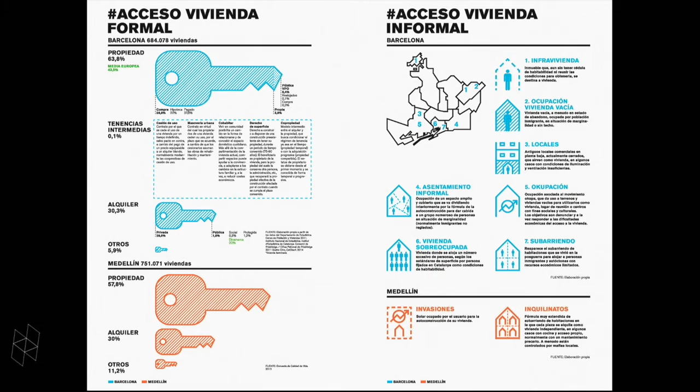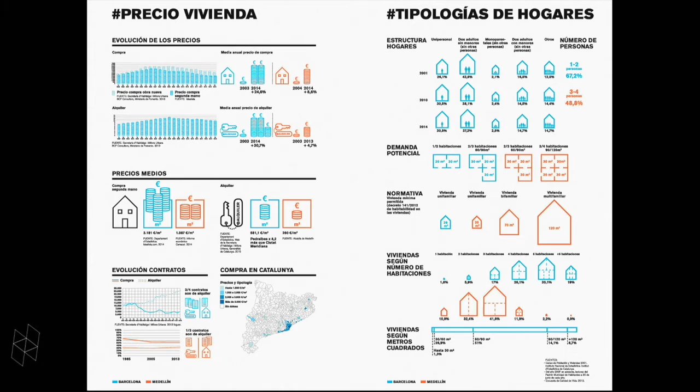So the exhibition took several hashtags: the tenures, the informal access, the price, the typologies—which of course we know the laws in Spain are terrible because we still work and design like the family house, when we know there are many other demands on housing—the evictions, the empty houses, the cooperatives, the refurbishing.

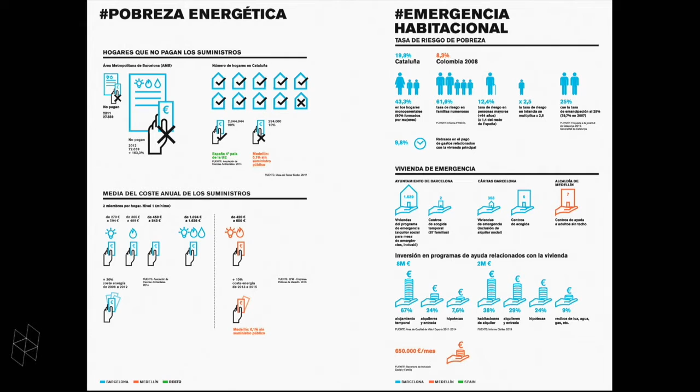The fuel poverty, where 10% of people don't heat their houses, and we know this is a very big problem with costs on health and health services. The emergency, the homeless, gentrification—I'm not going to stop there, but as you understand, we are losing one neighborhood every 5 years—and health.

So we didn't want to be so pessimistic, and the exhibition was an optimistic claim, because we think that many people, just because the government didn't do anything to solve the problem, have invented new ways to solve that problem.

With different strategies, putting people at the center of municipal policies might be a way to change what happened. The inside strategy—we were talking yesterday with Carles Muro about the Nolli plan—we are talking about the black, not the white. We're talking about what's happening in that black box, thinking that maybe we can make a new cartography of the city by starting there, talking with the people, knowing exactly how they live, and then thinking about which kind of street you need.

And of course this idea of tactical and pilot housing, which is a tension against quality and quantity. We need to build a lot of housing, and we know the best housing takes care of the people. So this is slower, and the quantity is less.

So we went through many projects. There are more than 70 projects that we are now doing in several parts of the world, constructing an archive of different solutions about cooperatives and different ways to design.

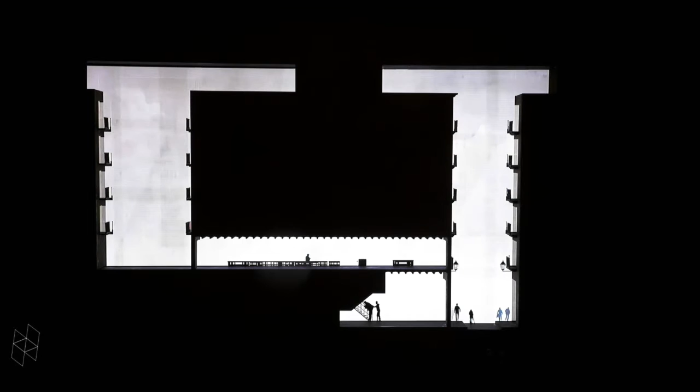This is a beautiful picture of how they designed La Col, a house in an occupied space in Barcelona. La PAH, the work they have done around evictions, just by changing the laws. And some new projects about homelessness, which take care of this idea of the first house, house zero, making an evolution of the housing-first model.

Projects about fuel poverty, a beautiful project that won the Solar Decathlon in Paris, and they are implemented. The co-housing, Masovería Urbana, which I don't know how to translate, but means something that you don't pay for your house, but you help the owner to refurbish it, so you interchange work, and many other projects.

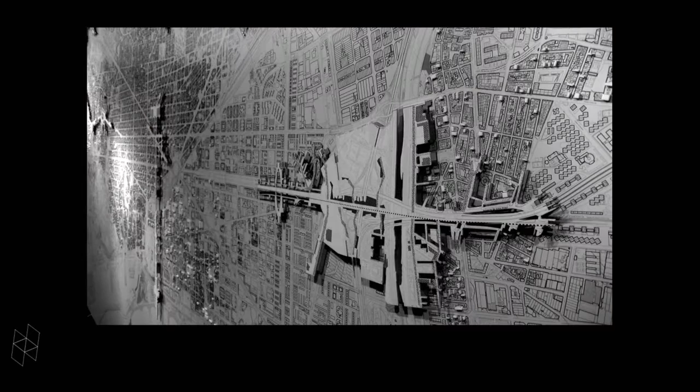At the end, what we were saying is that we can make a plan of thinking about the city. I hate when we talk about the city of the future, and I prefer to talk about the future of the citizens. I think the idea is not thinking about the city of the future, but realizing that the city of the future is already built. So thinking about how we could work with the city itself means we could build 100,000 houses, but not building any other neighborhood. This was an opportunity to end the exhibition with three main points we wanted to underline about how we should treat this problem.

One, it's about reform, or we call it rehabilitar, with this symbol of the crab that doesn't have a shell - el cangrejo ermitaño - which every time he needs to change house, he just goes out and finds another shell to live in. Or cohabit, which means we are living together. So most of the strategies of being one to each other, with the party wall, for us was a beautiful metaphor of this - not thinking about which are the party walls that are redefining the idea of the house, and maybe this is the first step to scale up and define which kind of city we need, trying to think that living together means something.

And of course, the most difficult and most important is to cooperate. We say that the best ideas are not yours or mine, they are the best ideas which are in the middle. To try to find that point, we need to structure another policy to work around housing. We always say the metaphor to describe this is the mayonnaise - you put egg, you put oil, and then there's a miracle that comes out of that. I think the 50 or 70 projects we have in this archive are little miracles of people dissolving themselves into a conversation where new typologies and new strategies came out.

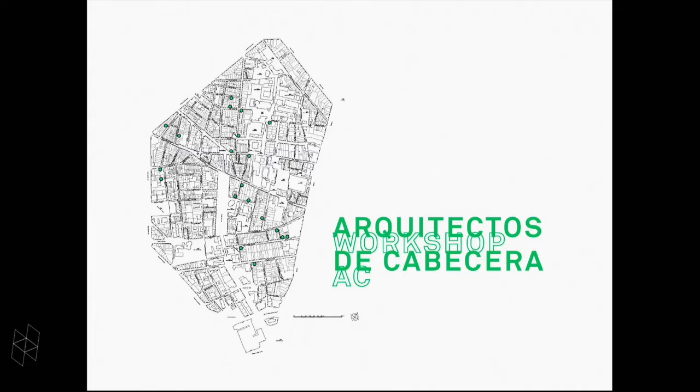Okay, well, good afternoon. I'm very happy to be here, to be part of this conference. I am not from Barcelona, I come from the fourth floor here, but after working with Joan for so many years, sometimes I think I am from Barcelona, and of course the work of the Laboratorio de Urbanismo has always been very influential to me.

Okay, so Latin American examples, a continent in 10 minutes - perfectly doable if I speak a little faster than normal. So here we go. Project as model, from experimental housing projects to generic urban types.

When we see the most ubiquitous landscapes of affordable housing in Latin America, an immediate contradiction appears. On one hand, as a region, the majority of its most recent affordable housing production has resulted in peripheral dormitory cities guided by the financial formula of repetitive cells. Yet, on the other hand, the continent throughout the 20th century has witnessed an incredible instrumental diversity in the design of experimental housing projects that perhaps open more nuanced positions regarding the right to housing, the right to the city, and design.

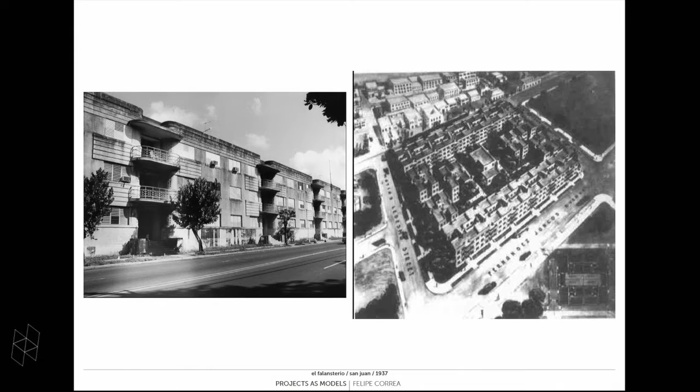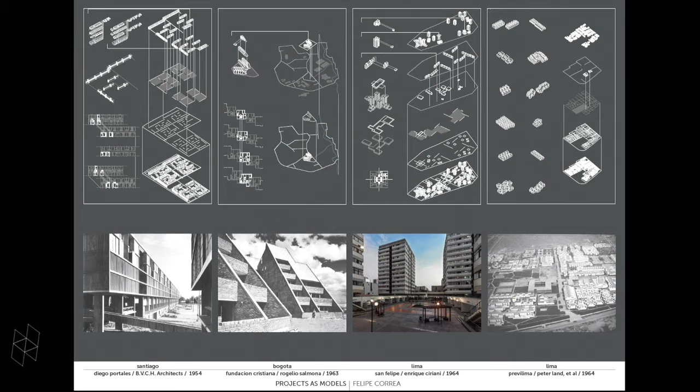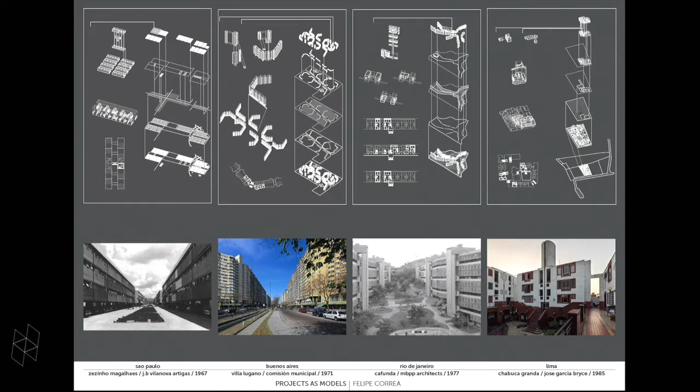In 1939, the Exposición Panamericana de la Vivienda hosted in Buenos Aires, along with the construction of El Falansterio, a New Deal project built in Puerto Rico in 1937, set the stage for an entire century of government-sponsored experimental housing projects. From the reinterpretation of neighborhood units in the Lima of the 1940s, to the use of brick as a socioeconomic unifier in Bogotá, to the development of microblocks in 1970s Buenos Aires, a significant collection of canonical projects set the stage for new relationships between domesticity and urban life, establishing design principles that can help rethink the current state of design of affordable housing in the region, especially given the recent push for denser inner-city housing in the context of large South American metropolis.

So within this context, I would like to, for the brevity of time, bring three pressing issues that I believe are confronting issues of housing, the city, and design. And the first one, I think I share a similar thought as Josep, which has to do with the break between the right to the city and the right to housing.

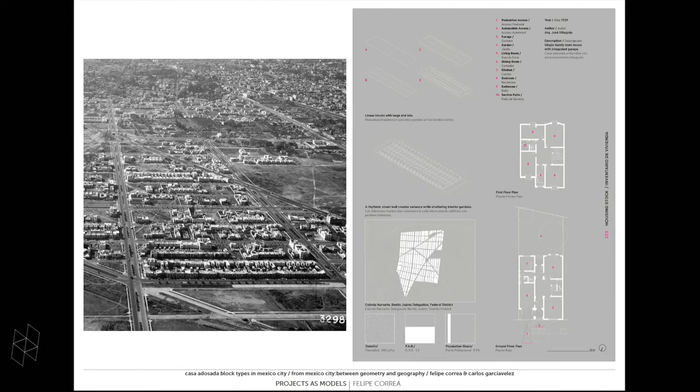If we actually look at housing production in major metropolitan areas like Mexico City, until the 1940s there was a direct alignment of public works, mobility infrastructure, and the production of housing through blocks. Here you see the investment in public works in magenta, and then the development of the Casa Adosada, a prototype that built significant areas outside of the historic center.

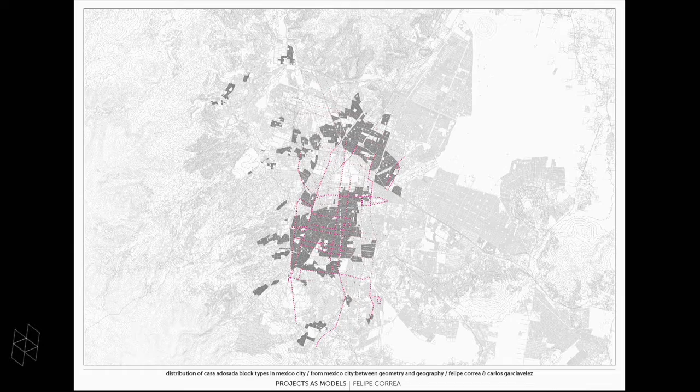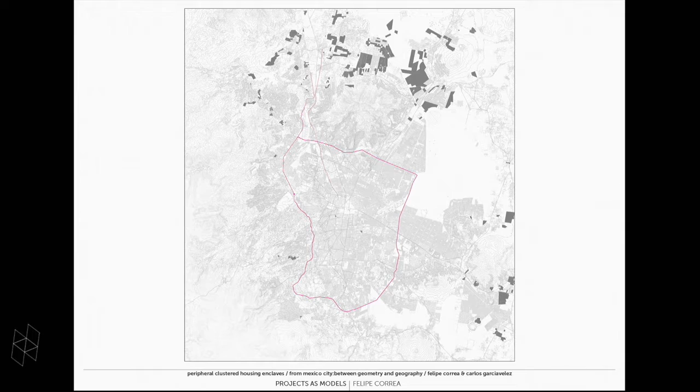If we move to the 1980s and 1990s, we begin to see the development of dormitory cities, peripheral clustered housing enclaves, which have complete disconnect from where the investment in infrastructure is going. All the money is going to the periférico and the double-decker, and housing becomes a private real estate venture primarily funded by global capital funds.

In this context, it is very important to go back and look at the more canonical projects within the region that can give us references for the production of inner-city housing.

For me, one of the most important projects is El Silencio by Carlos Raúl Villanueva in Caracas, not only because of the development of a very traditional block morphology on the exterior, and then a very experimental modernist retreat that allowed for increased density within the interior, but also because of the decision from the city to place housing in one of the most important central axes, in a site that had been left as a void because of a plague that killed a significant number of inhabitants in the area in the late 1800s, but was requalified in the 20th century to place affordable housing.

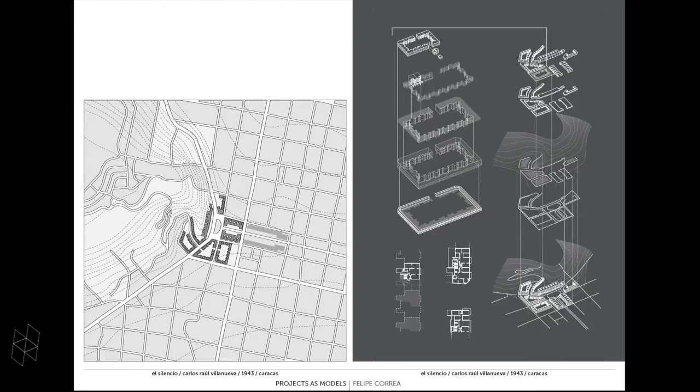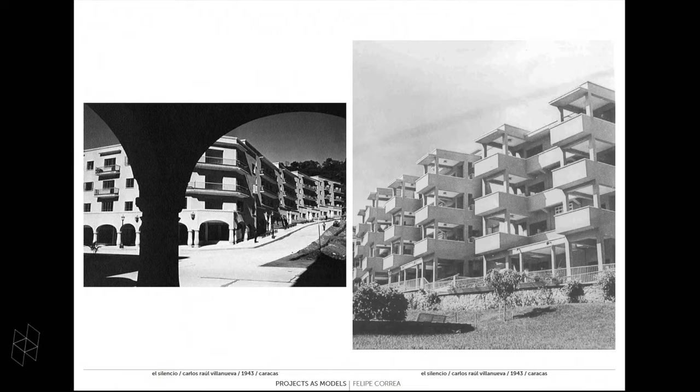Here you can see the relationship between an exterior block that reconstitutes the block, puts commercial on the lower levels, and then the way the modernist block protrudes inside each courtyard.

I think this model of rethinking housing in terms of high-density mid-rise blocks becomes extremely important as major metropolitan areas in Latin America continue to release significant amounts of post-industrial land.

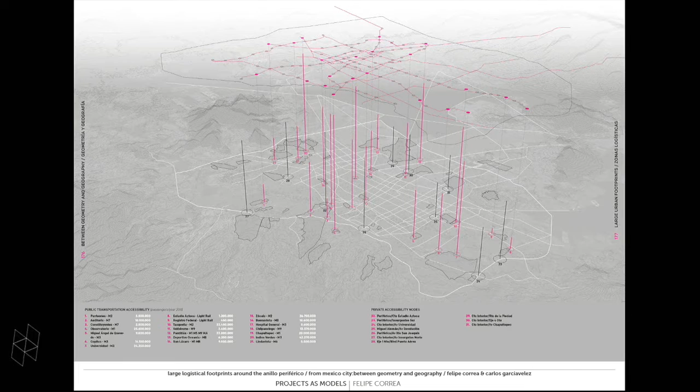In this case, this is an aerial view of Mexico City. But also beginning to rethink large-scale infrastructures that can be reduced, and land that can be released for other uses—looking at what will soon become the old airport, the Central de Abasto, infrastructures that have to be rethought in direct connection with the existing mass transit infrastructure.

The second aspect for me has to do with the spatial limits of housing clusters and the economies of scale that produce them. This is a very recent project in the periphery of Caracas, where the scale of production has nothing to do with what we might understand as the different scales of community. What constructs community and what constructs government housing projects is completely misaligned.

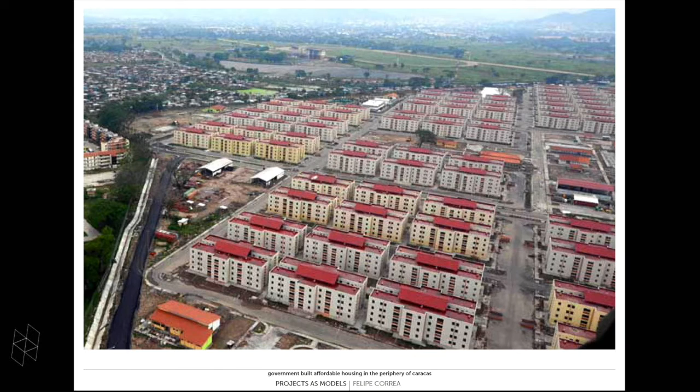In this context, I think it's very important to briefly take a look at a city like Lima, where throughout the 20th century there was an incredible push for housing as an element that could become part of a larger urban language. This happens because of the incredible coincidence of having someone who was both an architect and a president—first mayor of the city and then president—Fernando Belaunde, who developed a series of very important experimental projects that have to be revisited today.

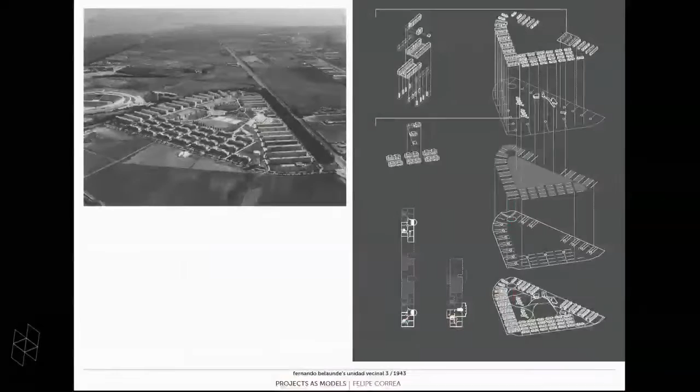The first one being the Unidad Vecinal 3, where many ideas of the neighborhood unit get translated and redeployed in the context of the Latin American city, where public services are placed in the center, and very diversified typologies begin to accommodate each edge, connecting to the rest of the city.

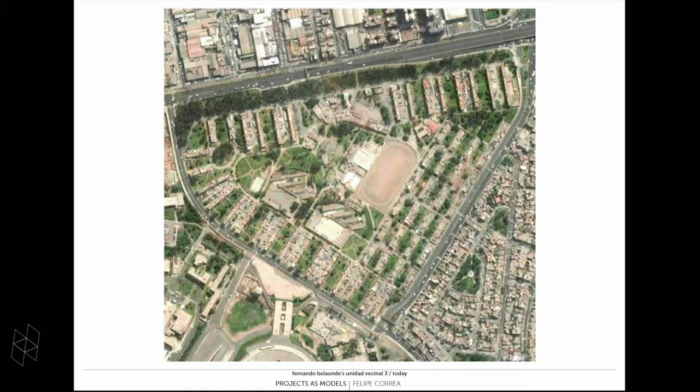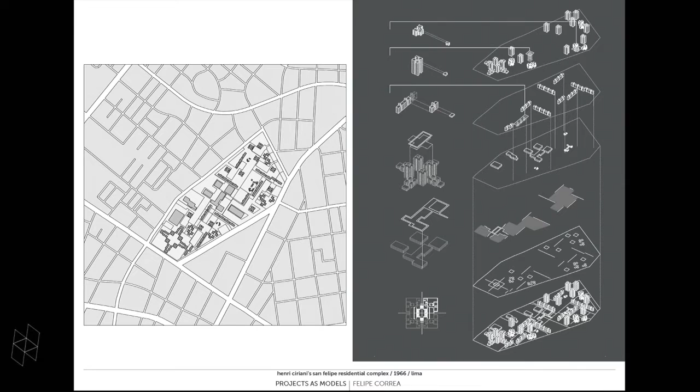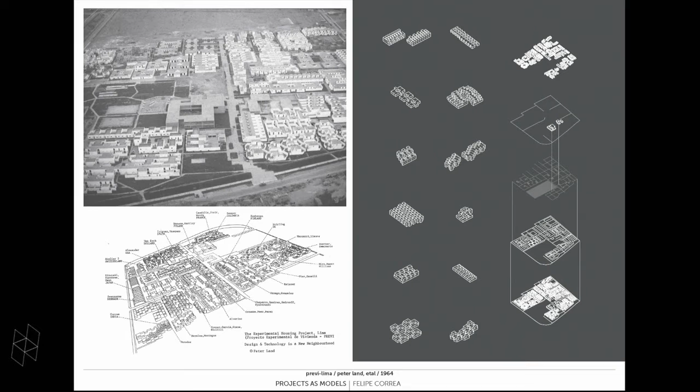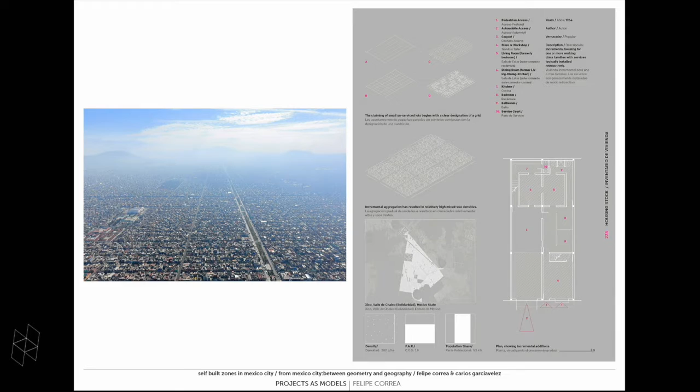Good, I only have one more point. The third one, for me, has to do with the idea of housing, the self-built, and the incorporation of self-built or informal neighborhoods into the legal life of the city. There's been a lot talked about the gradual transformation and adaptation of informal settlements, but I think there's another aspect. In Mexico City, over 50% could actually be defined as self-built. Not all informal, but self-built.

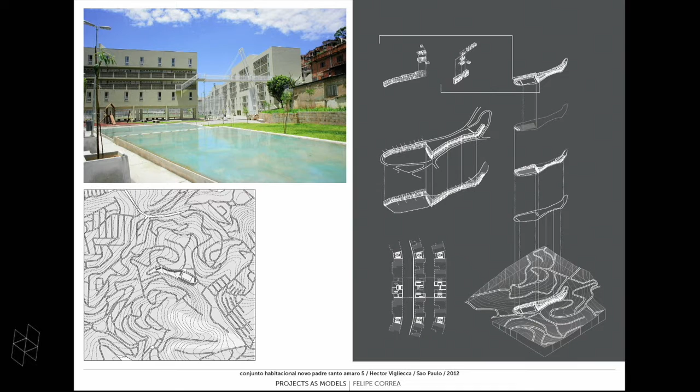But I think the other critical component has to do with the way new housing typologies can not only transform existing self-built neighborhoods, but also introduce a different variety of housing types. In this case, the Conjunto Habitacional Novo Padre Santo Amaro in Sao Paulo, we see the introduction of a very interesting linear bar building, very Paulista in its architecture, but also a public park that allows connection between the upper and lower parts of the city, becoming a thoroughfare that gives a great level of activity on the ground.

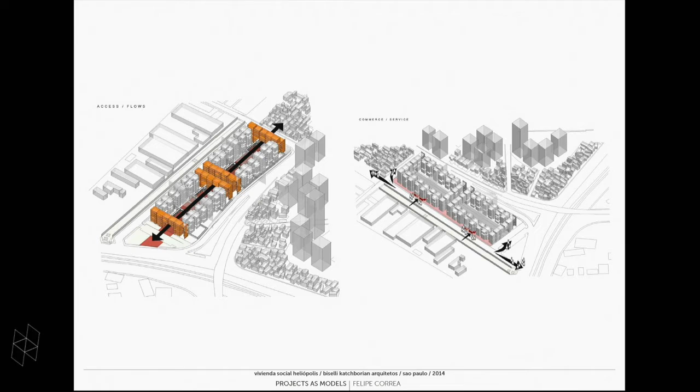Finally, to leave this a little more open as a question, for me the next challenges have to do not only with rethinking the larger metropolitan areas, but also seeing the opportunities for confluence between larger planning strategies and specific design interventions in secondary cities in Latin America. In fact, those are the cities of greatest growth in the region—the Mantas, the Natals, the Iquitos of the world—that need the agency of design so they don't make the same mistakes made in some of the larger metropolitan regions.

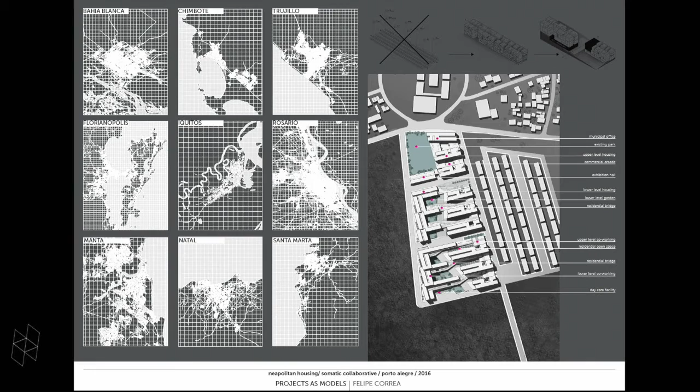In this case, this is a project we are working on right now in the office in Porto Alegre, aiming to bring a new centrality with co-working, municipal offices, and mixed use, to create an open block typology that might move some of the labor from the center of the city and establish a new centrality in the periphery. Thank you.

Go, you might need this. How does it work? Forward, back, pointer. Goes, no?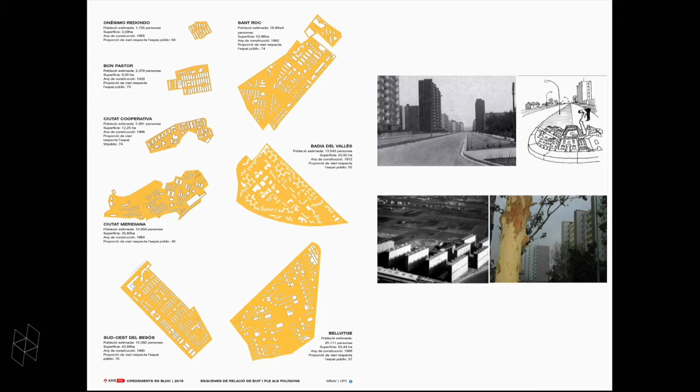With Barcelona's highest eviction rate, the distinguishing factor, it turns out, is their access to public transport and connection to the city core. Their respective positions relative to public transit, new housing, commercial activity, and public space offer a clue to what's happening and what can be done. Bellvitge is adjacent to one of the best hospitals in the country and close to the airport. Even though there is no continuity, the commercial facilities aren't well located and there is too much repetition, it's still considered one of the best barrios to live in Hospitalet, a city of about 250,000 people—sort of what Cambridge is to Boston.

Our study mapped the connectivity of Bellvitge and Badia to 23 of Barcelona's major facilities—universities, hospitals, parks. A central avenue links Bellvitge to the core of Hospitalet, with excellent connections to the institutions and services. Badia, on the other hand, lies farther out and is completely cut off from the university. It's 27 minutes to go from Badia to the university—that's just across the expressway.

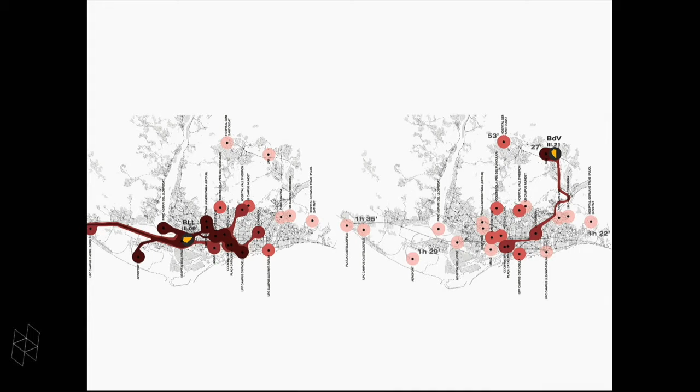To make housing projects like this integral parts of the city, we need to begin by breaking down or dissolving their borders. My colleagues Oriol Clos, Josep Parcerisa, and I developed a plan for Badia all the way back in 1984. That's an image of the plan. It would have: one, reduced the number and size of open spaces; two, created smaller plots upon which to build new housing and businesses; three, connected the street system to the surrounding areas.

In 2006, Badia was also the focus of a major exhibition at the Fundación Tàpies in Barcelona, dealing with the empty city, curated by the artist Pedro G. Romero. In this painting, I try to express the absurdity of these in-between spaces and the neighborhood's crippling mental and physical isolation.

The criteria for interventions in this barrio needs to be rethought one by one: the principles of the Modern Functional City, that is, zoning, including variety in the housing prototypes and disorder, inserting the Rue Corridor and the avenues, inverting the principle of healthy emptying by selectively filling in, imagining transformation and evolution of the site. In other words, understanding that demolition, substitution, transformation, and additions are not dirty words for these areas.

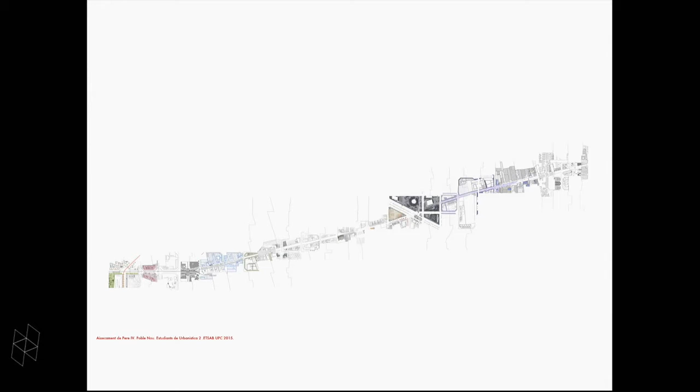The main corridor of Poblenou is Pere IV. Last spring, a group of six of us, among them Eulalia Gomez, worked with our students to study this one street. The first thing we discovered was that the park that bisects Pere IV in two, a beautiful Jean Nouvel project, stops most of the street's activity.

We built a model that spans the length of Pere IV Street and proposes more than 8 interventions. The model, now in the Barcelona City History Museum, can be used as a thought exercise to insert new housing. We have to distribute projects among a range of different operators and collectivities. If we do, we'll foster the diversity of programs, people, and opportunities we need to create a more equitable city.

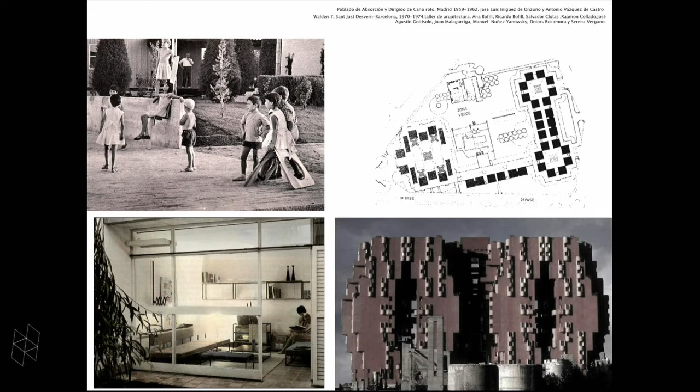Let me finish with these two images of affordable housing built between 1959 and the 1970s, before all we have been discussing in these exhibitions. Two projects that have most in common: variety of housing, interesting public space, and experimentation. In Caño Roto, this is Madrid, but could be Barcelona, the housing types are delicately designed, the public areas just beautiful. This is not a playground by Aldo van Eyck, but the reference is obvious.

The architect Vázquez de Castro went to live there. That's his wife in the photo.

Walden 7 is a singular experiment in residential development along Barcelona's periphery, a kasbah that organized a thousand units—I don't know the exact size. This cluster of houses and facilities, and also of ideas, suggests a beehive in its inner public spaces. Many of the architects who worked on these projects went to live there. Ricardo Bofill still has his extraordinary office inside the cement factory that was saved from demolition.

These days, at least in Spain, access to affordable housing has to do not only with a shortage of units, as in the post-war period, but rather with a shortage of funds—not units, but funds, money—on the part of the majority, to be able to afford the rent or the down payment. The pressures of real estate speculation run amok haven't helped. Let's find the fringes and in-between spaces in which to insert affordable housing in these two urban fabrics. Thank you.

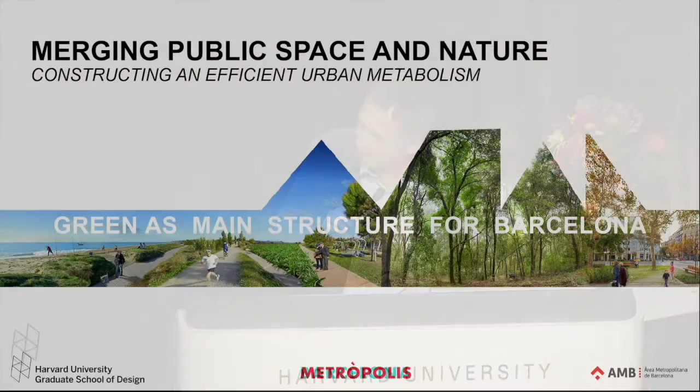My presentation will be in different videos. But before this, I also want to speak about the word. Normally I use other words, but Joan showed me a verb in English that I didn't know before: the verb merging. Now I begin to use it in all the presentations that I do. Because, thanks Joan, I like the word merging very much. Normally I use other titles for my presentations; many times I use The Garden of the Metropolis, which is the title of my book, for the reason to try to sell the book, no? But now I begin to use merging, because I think it expresses very well the things that I will present to you.

Well, I suppose the videos will work. The first picture you see is possible to see in the exhibition here in the hall, about this giga photo that we did last year, that tries to explain that our streets can change, can renaturalize, no? The streets, the squares, our houses, and connect with the natural space that we still have.

But also to the agricultural lands that still remain, and also the rivers, and all our open spaces that we have in the city. Agricultural land, rivers, sea—it's possible to establish a network about these spaces. Connectivity is possible. Why don't people understand that we have all these spaces in our city? Well, this is the question that we try to find.

Also, we work a lot with three words that came from different people that work in our team, in the PDU with Area Metropolitana: ecology, leisure, and production. When we began to work with this, we worked with a biologist who spoke about ecology, with agronomists who spoke about production, and with an architect—me—who they say speaks about leisure. And then we put together the three words, and from that day we decided that the three speak about three things together, because the three things work at the same time: ecology, leisure, and production.

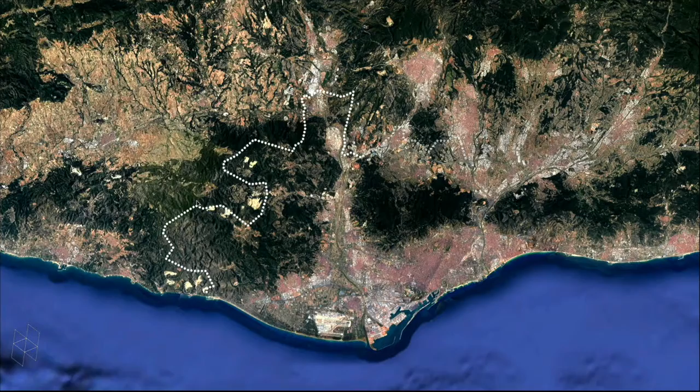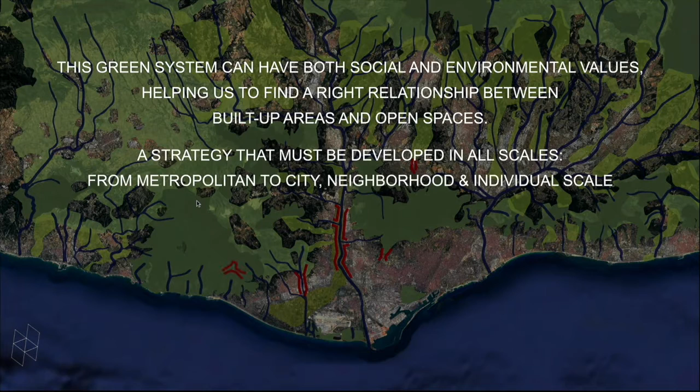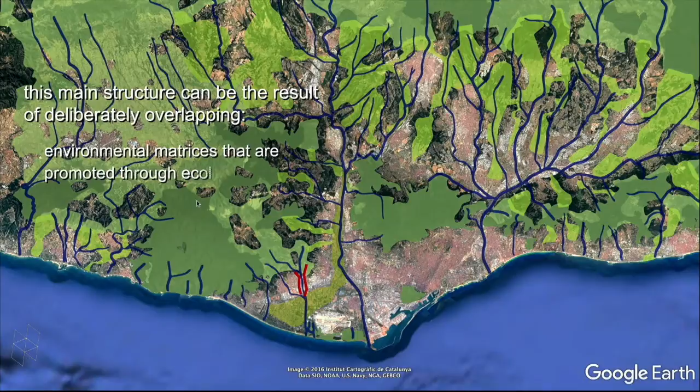The scale begins with the ecological matrix that many people draw. There is a map with mountains, rivers, agricultural lands at the scale of a satellite view of Barcelona. But if we move to a place called Viladecans, we can see that we are also interested in other scales.

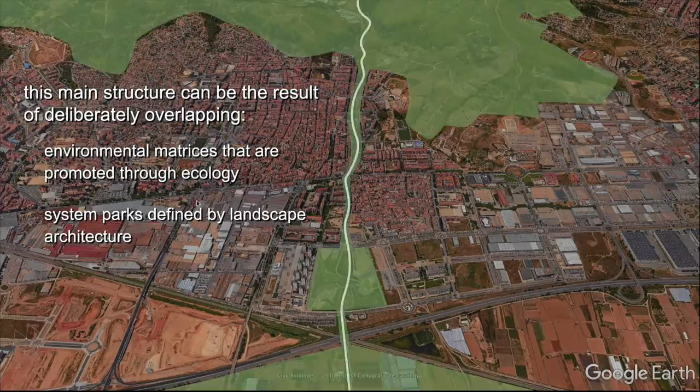In the scale of the system of parks, I like Olmsted, I like Boston. I always explain the system of parks of Boston. I think that it's still alive, though I don't know if that's the right word in English.

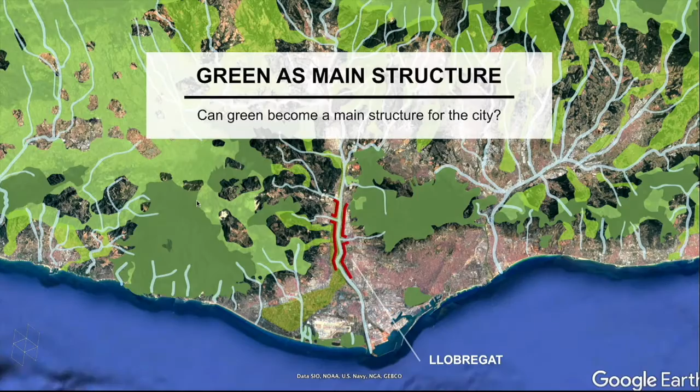We like to put together three scales: the scale of ecology, the scale of landscape architecture, and the scale of urban planning. This is a journey that is possible to make through all the scales, from the satellite to the magnifying glass. To understand this better, we will move to four different places with different ideas.

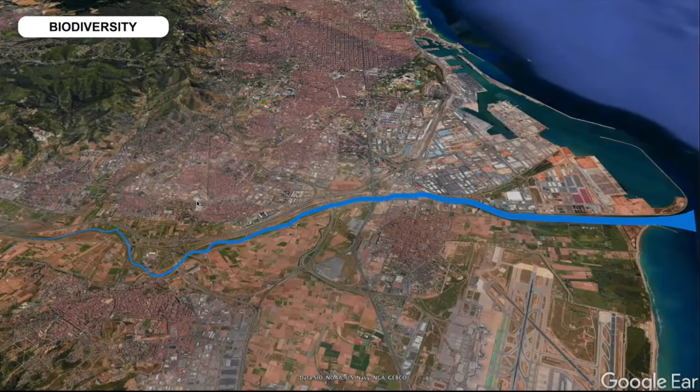The first idea is about connected spaces: connectivity, ecological and social connectivity, biodiversity, continuity, the relation between the different cities that we have in between or near all these natural spaces.

This bridge that we built here connects the city with the river. It didn't exist before, and it was impossible to cross this space and arrive at the natural corridor, which in this case is the Llobregat. Ecological and social connectivity, always.

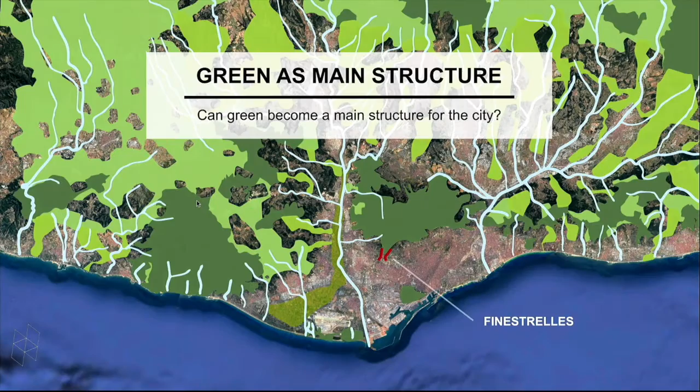We always work thinking that people are in movement. We don't use benches now, we say it's not necessary to put benches because people are always moving, walking from one place to another. Well, it's not exactly true, but more or less that's the idea: we try to connect one place with another, from one city to another, crossing the natural spaces that still remain in our city.

The second idea is about productive landscapes. In this part of the city, which is also an edge, a boundary, a limit of the city, we try to understand how it's possible to work with productive landscapes. The idea here is simple: biodiversity, connectivity, grow areas at the border of the city, more density in this place that was empty before.

In this part we design a park that is an extension of the natural park, and we design this big avenue that we plant with different seeds. One of the seeds was alfalfa.

And then what happened? It happened that in this area of Barcelona a shepherd still remains, called Cayetano. Cayetano is on the left. The other day I introduced Ramon to Cayetano, because there are different conflicts.

With Cayetano, for example, with the bikers, but also with the police, who don't know if this is good or not. It's a question also for the audience: do you think this is good or not? These are students from my master's program who the other day worked with the sheep here.

With this idea that we now call farming the life. I like these words, farming the life, because what things do we want to farm in the city? Well, we can farm food at kilometer zero, but also we can farm energies, materials for new things, and also the recuperation of life.

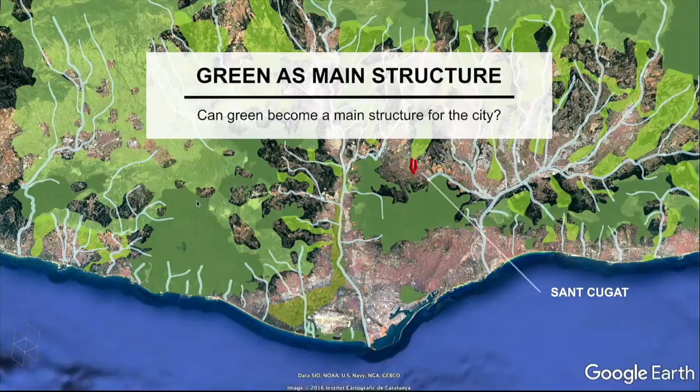The third idea is about another place, called Sant Cugat, which we designed many years ago, and I will try to explain the idea of living on the edge, to draw the new edges inside the city.

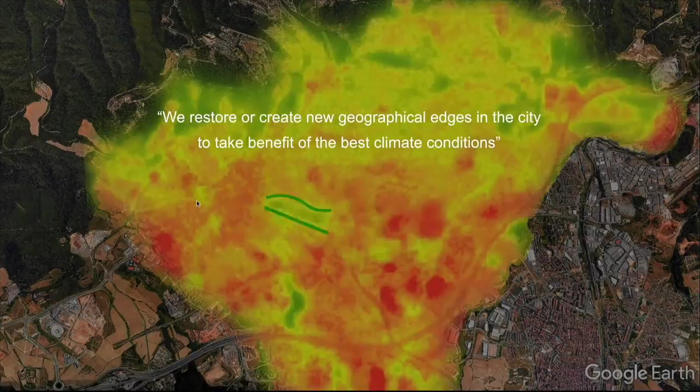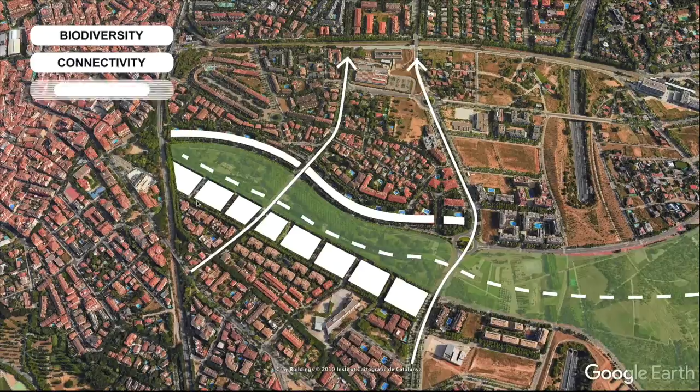In this place we designed a new part of the city that you can see now. It's now the coldest part of the city, the place where the temperature is lowest in Sant Cugat. It's also a corridor with biodiversity that connects with the exterior, the grow areas near the park.

In this area, the idea is that we want connectivity, we want productive landscapes. What we try to design is better edges in all these parts. The relationship between the urban fabric and the natural spaces that we want to conserve and extend is the most important place to build the new parts of our city.

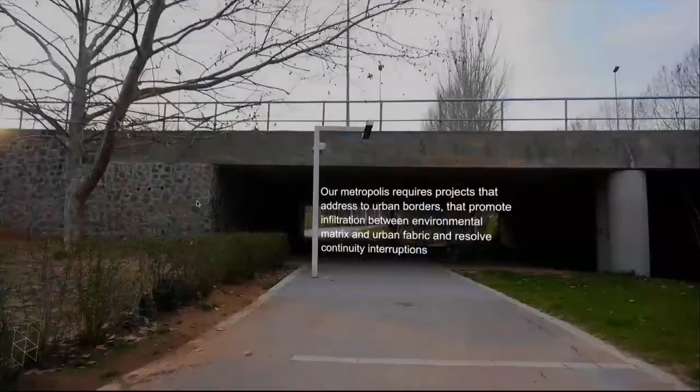Always in relation, this point that is between two parts. We say in our office that we are always in the middle, between one part and the other. We are not in the city or in the natural spaces, we are always on the edge. I like to live on the edge.

And to cross all the barriers and walls that we build in our cities, to design strategic limits, I think, is one of the best parts of all the plans, especially for the PDU in our city that has 50% space like that.

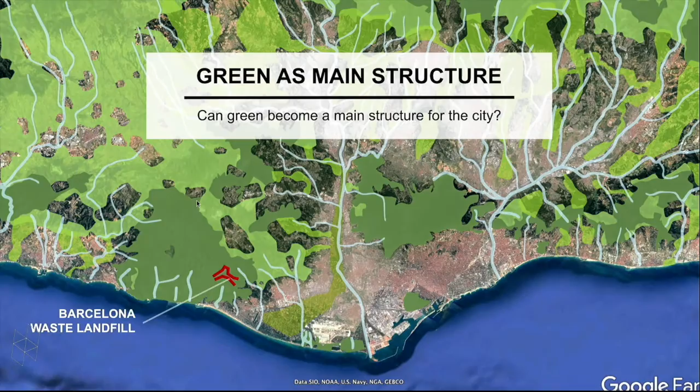And the last one is to visit another project we do, outside the city but also in the city - the waste landfill, where we put the waste during 40 years, for 4 million people. So sometimes we say it's the most urban part of our city.

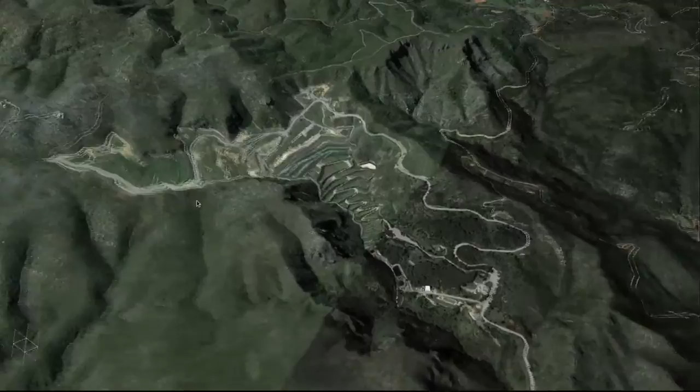In this part, where is it possible to work in this way? We say always, in all places, anytime, anywhere, because we need to change our house, like Josep says. We can change the streets, our public transportation system, but we can also change all the places, including the worst part of the city - the worst part of the city that now is restored with our project.

Now it's presented in Venezia. This is our stand at the Biennale of Venezia, also presented with Farming the Life, with this idea. And this man, this boy walking in our project, will show that all the ideas are connected. He's walking because perhaps he's arriving from the center of Barcelona, from Las Ramblas.

And arriving here, to this space that is also a productive landscape because we design it as agriculture, but it's also a new edge of the city. And it shows us how it's possible to change all parts of our city - the obsolete parts, the parts that now have another purpose.

To finish with this idea of green as the main structure for the city - when I explain things like that, people say, well, the important thing, like Josep says, is the small house, the house for everybody, or public transportation, or the economics, the social problems. And I always say the same: yes, but in all projects, perhaps the second thing that is important is things like that. For this reason, I say there is one objective, and the second objective can be a new green structure for our cities.

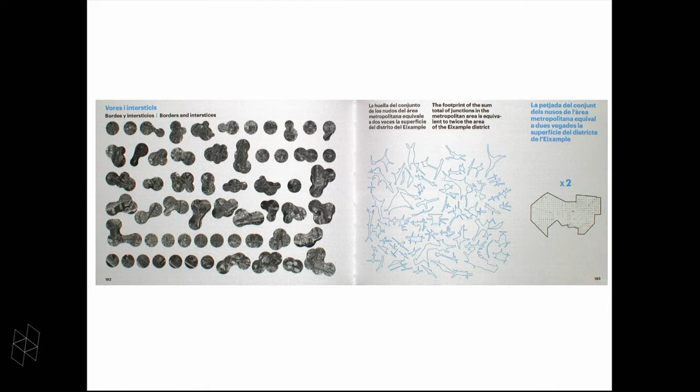Likewise, the need for the appropriate pairing of particular scales of drawing and statistics. So a zoomed out view of a metropolitan area that perhaps rightly so... let me see, I'm losing track of where okay.

So back to the statistical point, to say that a city has a 50-50 distribution of built to green is not enough. More fine-scale analysis will give light into issues of environmental equity, because not everybody has equal access to that.

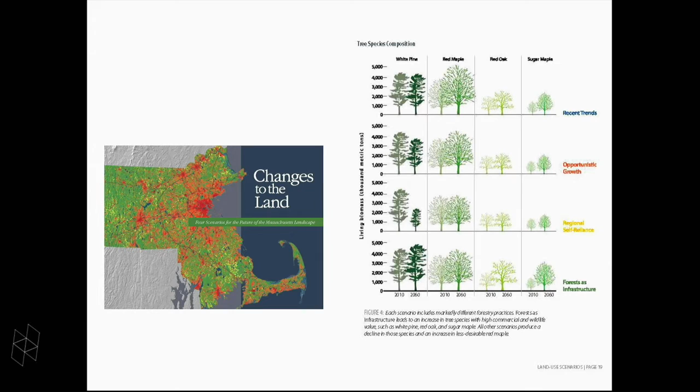A second technique that should be more commonly used, it's been used, but we should do more about it, is comparative studies. So cities compete globally for markets, as this exhibition demonstrates as well. And the comparative studies in the show give us a good understanding of how geography and economy come together at a global scale. But that needs to be extended to the study of the green, because of the green in the regional urban landscape, if not the municipal as well.

So today, comparative studies with other cities are increasingly important, for the reasons that we need to learn as well from what works and doesn't work in other cities. The Trust for Public Land and other organizations already do some of this very useful work, but a lot more work in this sense is needed to turn this into a design instrument.

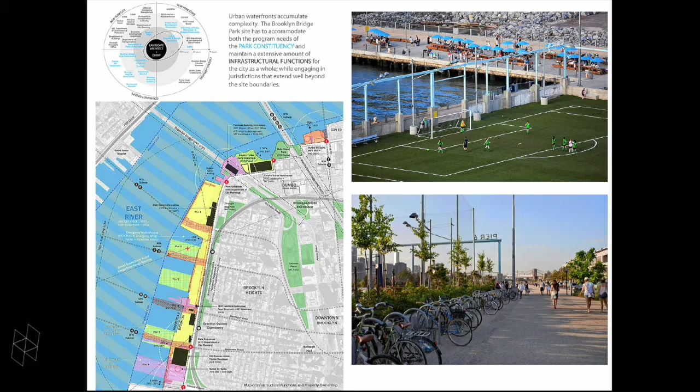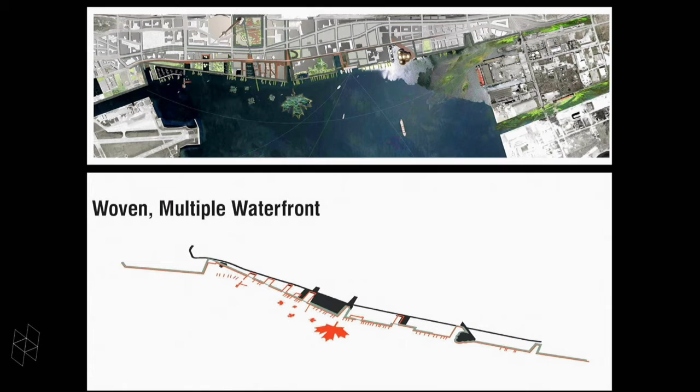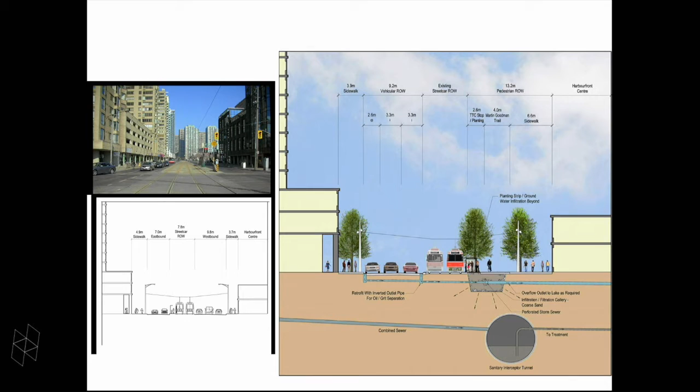To the long list of urban landscape types, we will need to add more in the future with different institutions that support and maintain them. With current challenges of climate change, energy, food security, accessibility to clean water, more demands will be placed on the landscape. Density, which is usually ascribed to buildings only, will need to be projected onto the ground, with increasing contestation of space. How will density play itself out in the urban surface? It has to be through hybridization, where monofunctional spaces become obsolete, and instead this kind of section indicates the joining of one function in the city with another, making landscapes more possible by stacking their functions literally and institutionally, to produce multifunctional, multi-layered urban environments that do more than one thing.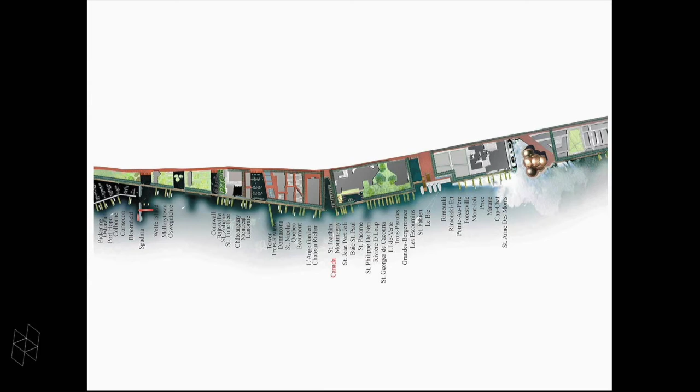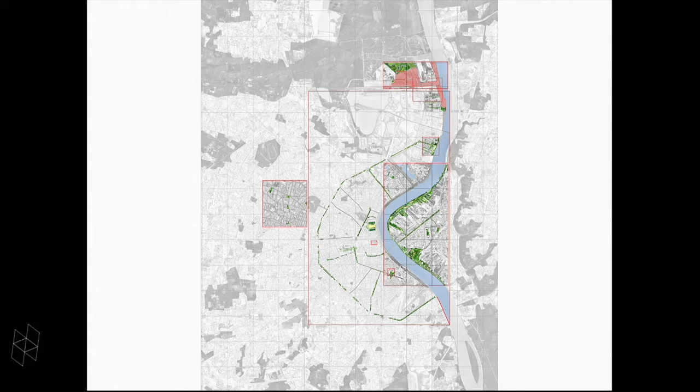Almost done. Secondly, we need to find more places for new landscapes and new uses for it. This well-known case of the project in Bordeaux by Michel Desvigne—these are landscapes that emerge as transitional strategies in terms of their status in the city, between shifting economic systems in that city. Large plots of newly forested land have an ambiguous classification in terms of what we typically associate with urban landscapes, yet they broaden the categories of what is possible. In the case of the Louvre Lens, the physical traces of the coal mining history were requalified and reformulated, turning them from a negative side effect to a positive urban framework, with side projects that make possible the museum understood as an integral piece of that plan.

One often utilized notion is that of the good life delivered through easy access to well-designed parks, plazas, vegetable gardens, recreational and natural spaces, and clean water and air within easy reach of everyone's daily routine. But I have to emphasize that this is clearly aspirational and a tall order in most parts of the world, including in the United States. Looking beyond the green and into the different ways that green is more precisely argued for, represented and positioned in its broader institutional, economic, and social context, will give it its due relevance in today's city, such that the green will continue to exist. Thank you.

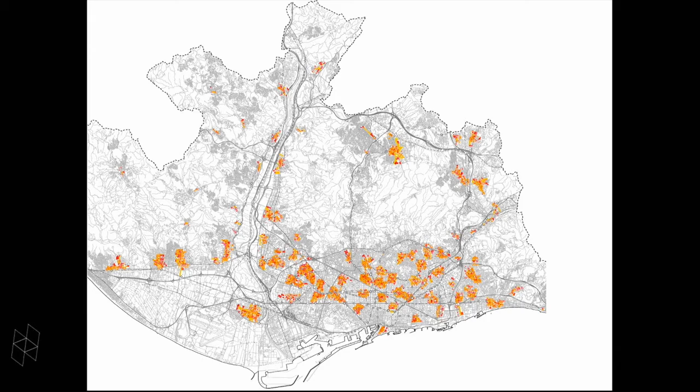However, we know that this—sorry, because I move, I am lost. Which is it, this one or this one?

However, as I was saying, we know that the family of these urban spaces is wider, and today we have a much more complex urban network, also composed of other expressions of collectiveness, like this one.

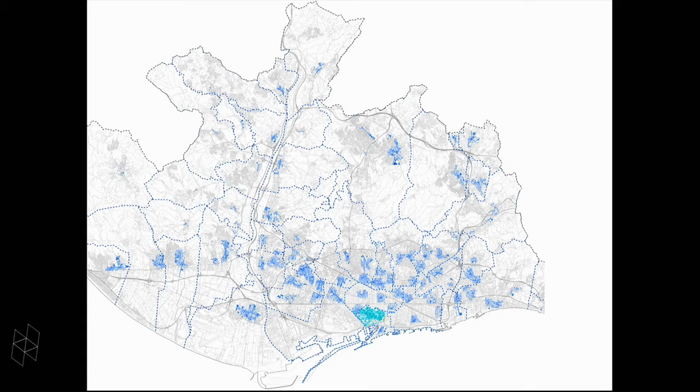Professor Robert showed us before some of the housing estates' current situations, and I think it's a good example of how these central collective spaces have been strengthened in the last decade through determined public policies and investment, tackling the risk of social marginalization in these areas.

At a larger scale, also described before by Professor Batlle, we know that these fantastic beaches and linear parks are the most celebrated metropolitan open air structures, and I'd like to highlight how they reinforce metropolitan awareness, making the metropolis more intelligible, scanning the seafront, scanning the river valleys, viewing the whole city from above.

Indeed, the Tibidabo theme park on top of Collserola inaugurated, one century ago, this tradition of creating a common place from which the metropolis dimension can be understood.

It has also been mentioned, this successful marriage of facilities and open spaces, especially fruitful in the last few decades, with an enormous proliferation of new facilities.

We have interesting or excellent small and medium size facilities in Central Eixample.

However, there is still a long road ahead to improve the placement of the large facilities - hospitals, universities, research centers, etc. - sometimes forming huge conglomerates, not very well articulated and all dispersed all over the metropolitan area.

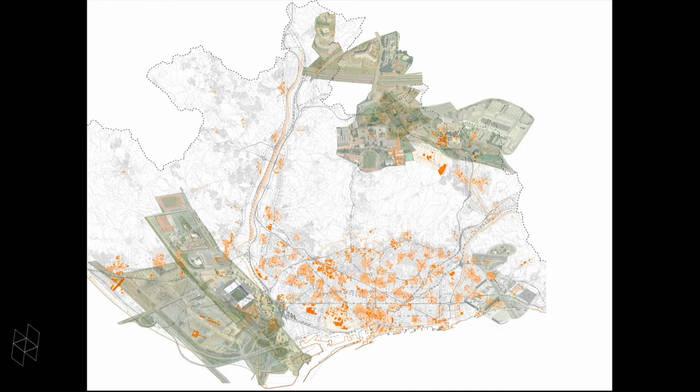In these coordinates, it is even more difficult, still more uncertain, to know how we could integrate many shopping areas. Our metropolis is not only a compact city, but also a polycentric city with a lot of different expressions, all located in the outskirts of the towns and the cities.

Maybe we wonder if we could extrapolate some experience from the urban commercial centers. It's probably difficult, but it is worth dealing with.

For example, if we take some internal urban examples, we can pay attention to how they have tackled improving the connection with public transport hubs, or how they have mixed or added some mixed complementary programs.

In both of these cases, very well known for the local audience, we know that the challenge is how to enable the interaction between these contiguous large and small commercial structures.

Both are very important. It was yesterday highlighted by Professor Busquets in the presentation of the last part of the exhibition, regarding how to merge the thin network of small retail establishments and the large artifacts with franchises. In both cases we should be able to create some links to improve urban fluidity.

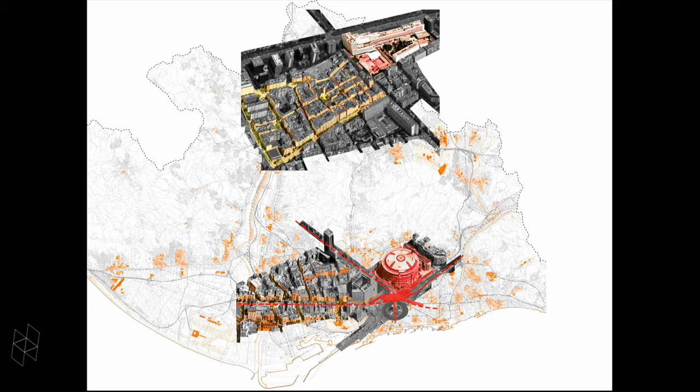The geography of the potential collective spaces at this metropolitan scale now depicts this alternative picture of the whole metropolis, which is the basis of a polycentric, not polynuclear, structure that blurs the borders of the 36 municipalities and thus becomes a more complex composition.

Beyond the ecological value of the public spaces, we have been discussing many interesting combinations, like the one with infrastructure that was addressed in the first roundtable with the excellent presentation of the keynote speaker, in many ways.

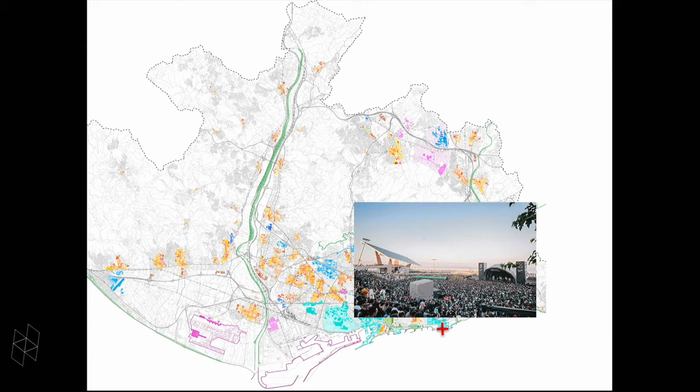But I would like to focus your attention on a very singular case of this space at the end of the Diagonal forum area, where a large platform has become one of the best metropolitan open spaces for large-scale events. And this platform is constructed directly on top of an enormous water treatment plant.

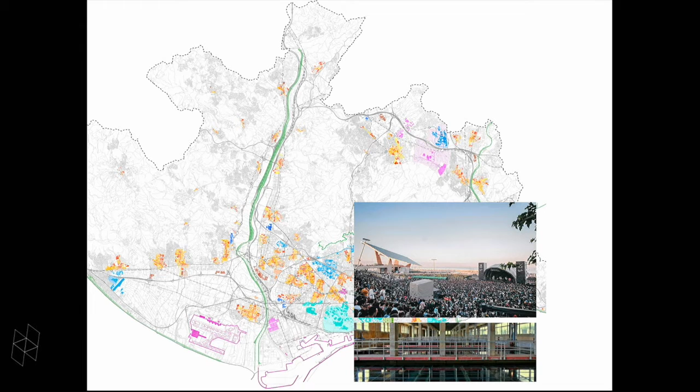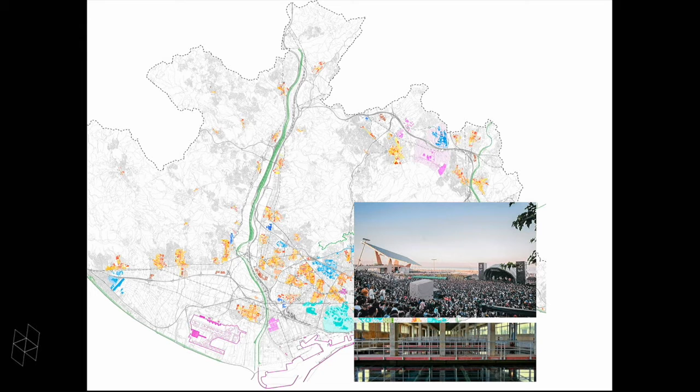This plant serves a population of 3 million inhabitants, so it's really remarkable - this very exceptional overlap of urban metabolism and open space, with dancers and water treatment at the same time, in the same place.

By definition, collective spaces are an incubator as well as a product of urban diversity. In this sense, it's interesting to share, at the end of the presentation, some ongoing urban processes related to two elements or components that have not been especially mentioned before - that is, creativity and innovation, and how they are motors for urban transformation, especially sensitive to social inclusiveness.

According to their size, they could seem apparently minor cases, but for me it's important to mention them in the way they try to, or achieve to, interlink the neighboring scale with the metropolitan scope - something that is crucial in the metropolitan construction.

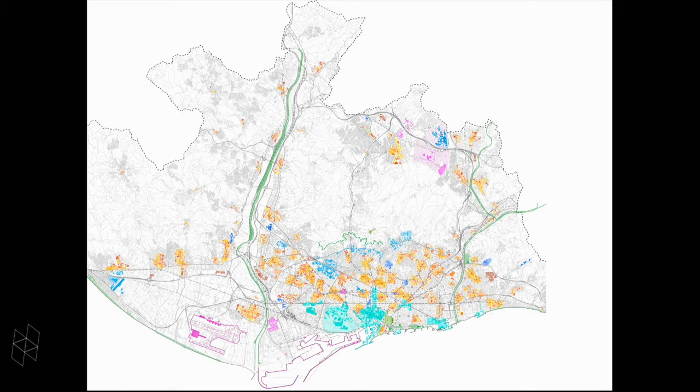First, in a former warehouse on the border of a working class neighborhood of Barcelona, the Ateneu of Nou Barris was born in a mixed cultural environment—mixed not for tourists, but because of the high rates of immigration in this district, far from the city center. It's a fabulous case of a self-managed cultural social community center that links artistic production with social inclusiveness. The former occupied space became initially a successful space for the interaction of young people at risk of social exclusion through a social circus, and then it scaled up, becoming a metropolitan reference.

Second, in another popular district, also in the eastern part of the city, the social pressure of local residents achieved the conservation of a former factory complex, interesting also in heritage terms, which pushed the municipality to transform this complex, the Fabra i Coats factory, into a collective site for cultural and social activities. It now hosts a factory of creativity and at the same time several welfare public services, so children, youngsters, senior citizens, artists and makers are joining this place simultaneously. Importantly, the old factory, a century later, is once again the social motor of the transformation of this neighborhood.